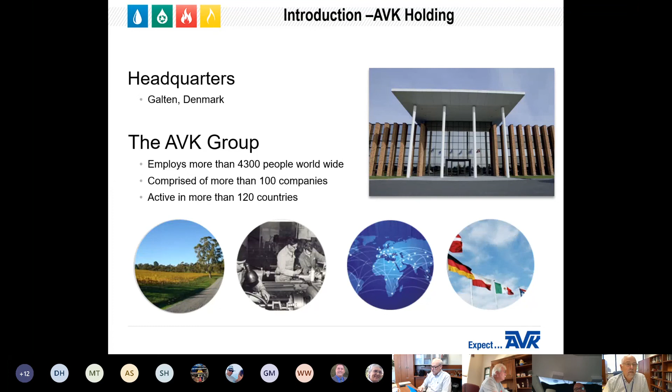American AVK was originally established in the San Francisco Bay Area in 1985. In early 1990, we moved to Fresno, California. In 2007, we built our new 180,000 square foot manufacturing facility on 25 acres of land located in Minden, Nevada. Minden's about 40 miles south of Reno near Lake Tahoe.

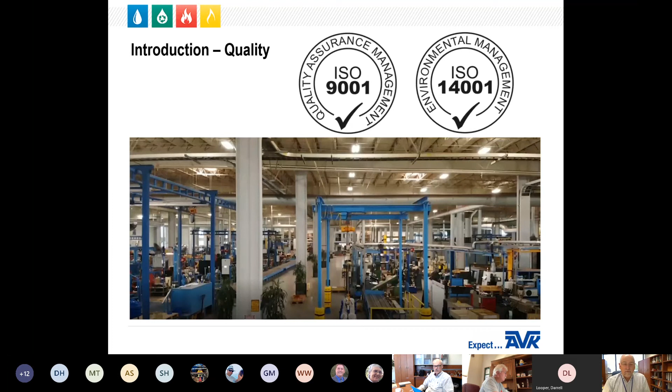American AVK Company is certified to the ISO 9001 Quality Management Standard and also to the ISO 14001 Environmental Management Standard. The ISO 9001 standard ensures that we follow a continuous improvement process to provide a high level of quality from the moment we take your order all the way until our products are installed and fully operational. The ISO 14001 standard ensures that we follow an environmental management system to help our company minimize how our operations might negatively affect our environment. Our employee safety program is also included into the ISO 14001 system.

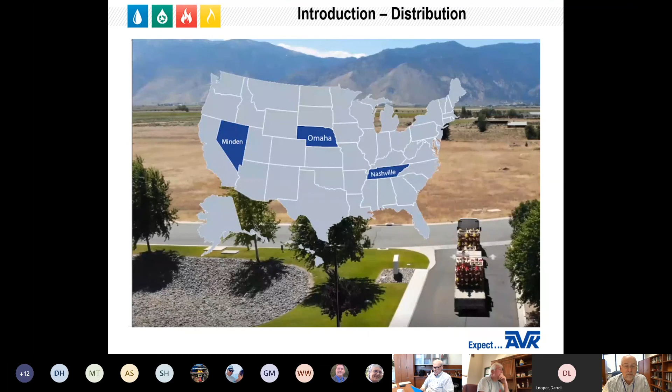Besides our factory in Minden, Nevada, AVK has distribution centers located in Omaha, Nebraska, and also in Nashville, Tennessee. This allows delivery of in-stock products to anywhere in the United States within 24 to 48 hours. Currently, we average about a 6-day delivery time for those items that are not in stock and must be manufactured to your specifications.

So now we're going to go into an overview of the features, advantages, and benefits of the Series 27 dry barrel fire hydrant.

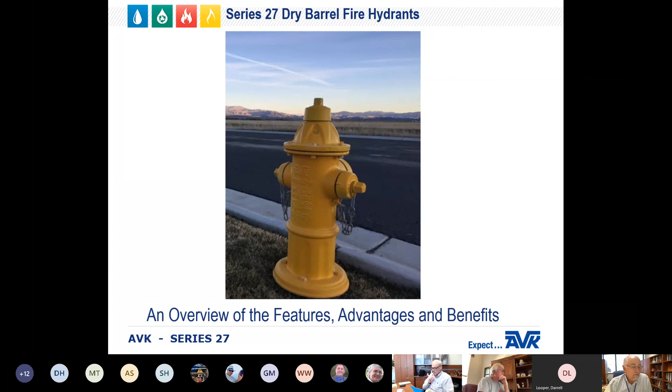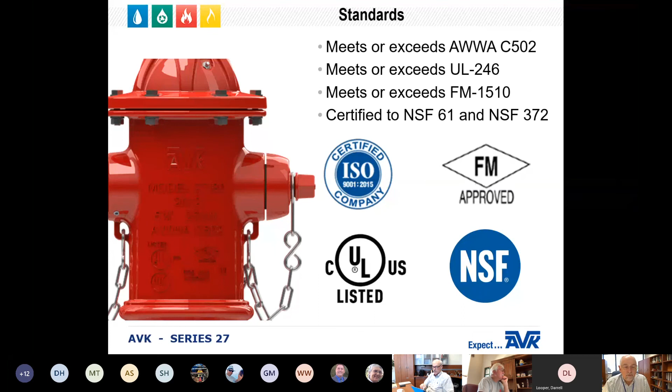The AVK fire hydrants are fully compliant with the requirements of the AWWA C502 standard for dry barrel fire hydrants. Our hydrants are listed by Underwriters Laboratories and approved by Factory Mutual. All AVK fire hydrants are certified to the NSF 61 standard for health effects and also to the NSF 372 standard for low lead requirements. AVK fire hydrants exceed industry standards in regards to flow characteristics and durability, so you can be assured that product quality and safety are our main concerns throughout the design and manufacturing process.

The two Series 27 hydrants shown side by side have one pumper outlet and two hose outlets. The nostalgic style is the red hydrant on the left, and the modern style is the yellow hydrant on the right. Keep in mind that all of the lower barrel, inlet base, and internal parts for the Series 2700 and the 2780 are interchangeable between the two styles. The choice between the nostalgic and the modern style hydrant is cosmetic. In other words, it depends on which hydrant you want to have displayed in front of your home or business.

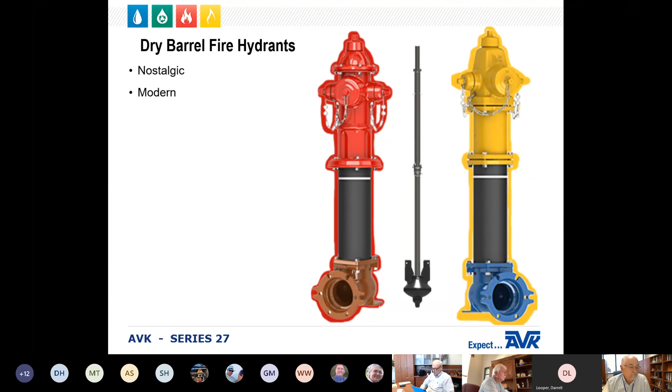Each hydrant is rated for a 250 PSI working pressure. Each hydrant is shell tested to 500 PSI and seat tested at twice the rated working pressure as required by the AWWA C502 standard. In addition, we have completed proof of design testing that includes a shell test at 1,000 PSI, traffic impact testing, and flow testing.

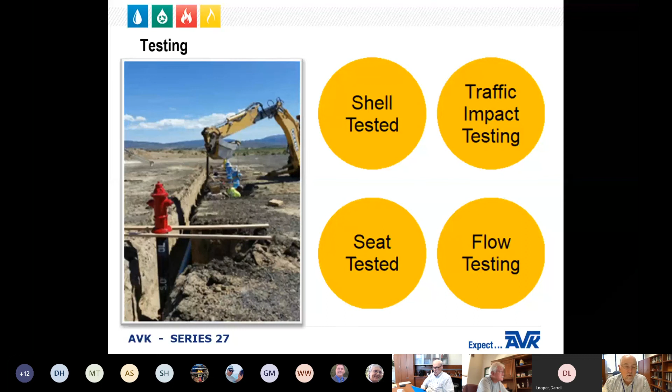In the photo here, you can see the AVK hydrant test site that's under construction at the Minden, Nevada airport for a traffic break flange performance test we did for Houston, Texas.

The internal and external coatings of the nozzle section and inlet base is a fusion bonded epoxy that provides excellent corrosion protection. The epoxy coating also provides a smooth lining on the interior surfaces for lower head loss and better water flow. The internal and external powder coating complies with AWWA C550 standard, written for interior coatings of valves and hydrants. The epoxy coating also meets the requirements of the NSF 61 and NSF 372 standards.

The external coating above ground has an additional polyurethane wet paint layer to provide the correct finish color shade required by the customer and to provide additional corrosion protection.

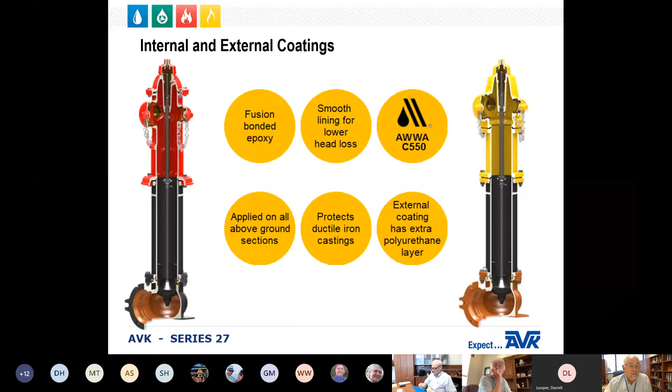The weather shield is a hat-shaped component that sits on top of the operating nut of the hydrant. As you might expect, the weather shield protects the operating mechanism from the elements like harsh sunlight, rain, or snow. It also protects the bronze operating nut from damage from non-standard wrenches.

So if someone tries to operate the hydrant with a pipe wrench, it might damage the ductile iron weather shield, but it won't damage the bronze operating nut. In the unlikely event that the iron weather shield is damaged, it's easier and less expensive to replace the iron weather shield compared to the bronze operating nut underneath.

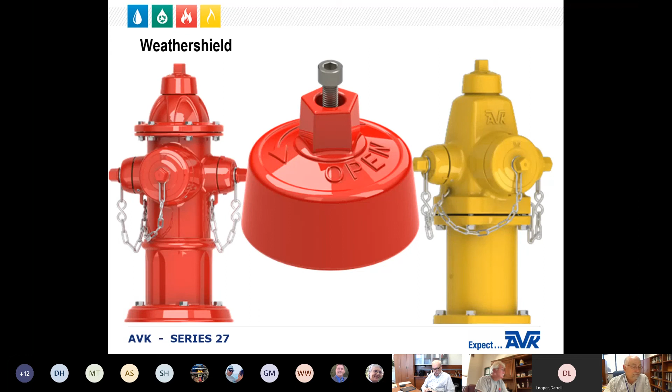The operating nuts on AVK weather shield and nozzle caps can be supplied in a variety of shapes and sizes to meet the needs of local specifications. We supply a wide variety of square, pentagon, or triangular shaped operating nuts.

In areas that require protection from tampering, we can also supply one of two different locking mechanisms, either a locking weather shield or a stainless steel high top thrust collar that surrounds the operating nut. The thrust collar requires a socket type wrench to operate the hydrant. It does not allow a typical hydrant wrench to engage the operating nut.

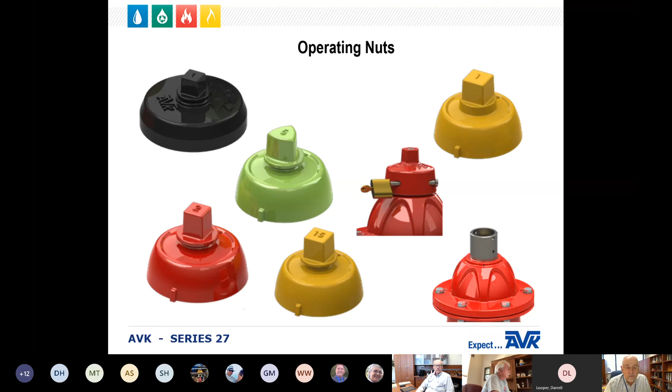These devices may be installed by the AVK factory when your new hydrant is being built, or they can be installed in the field by the end user.

Each hydrant is given a unique serial number that is printed on the paper base tag located on the bottom of the inlet base, and engraved on the top of the operating nut. Older hydrants will have the serial number engraved on one of the side faces of the pentagon, but because this was an as-cast surface, the serial number was sometimes hard to read, so it was moved to the smooth machined surface on top of the nut some years ago.

The unique serial number enables us to determine the date the hydrant was built, who built each hydrant subsection, how the hydrant was configured from the factory, materials used for each component, the pressure test results, and how and to whom it was shipped. In other words, the serial number gives us full traceability to allow better customer service.

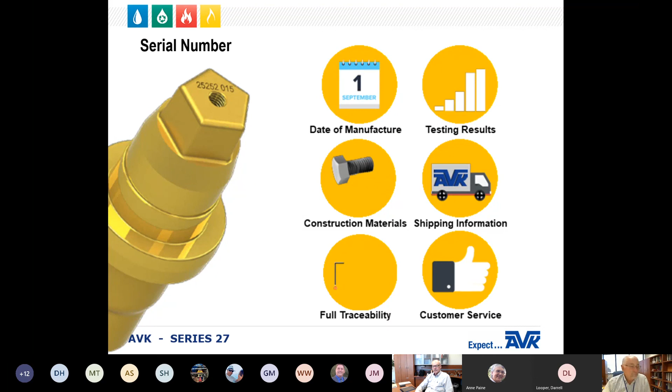The thrust nut and operating nut are cast bronze. The same thrust nut is used no matter if the hydrant is open left or open right. The thrust nut is equipped with internal and external O-rings to prevent water or debris from entering the lubrication chamber.

The operating nut is specifically machined for open left or open right hydrants and is hollow from top to bottom to allow easier installation of the lubricant. The hole through the operating nut allows air to vent out while the lubricant is being added into the lube chamber. The operating nut is self-lubricating, as oil or grease will flow up the stem rod threads.

There is a hole drilled into the side of the operating nut to allow air to enter or escape the internal volume changes due to the opening or closing cycle of the hydrant. The operating nut is provided with an upper stainless steel roller bearing to make the hydrant easier to open under high static water pressures. We have also included a lower polyamide anti-friction washer to ease operation during the closing cycle.

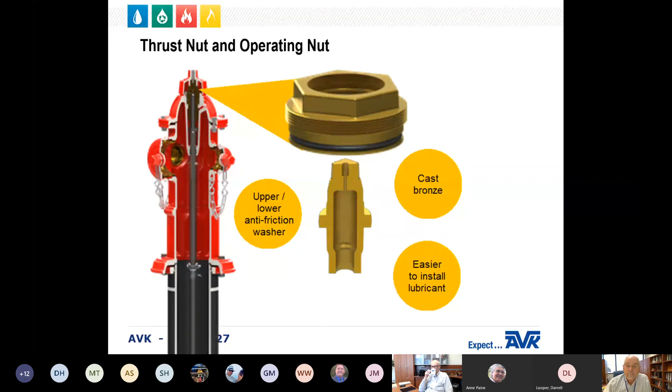The thrust nut is secured in place by a stainless steel lock plate and screw. The corrosion-resistant plate makes it easy to adjust the tension of the thrust nut against the bearings by offering 12 different locking positions on the thrust nut.

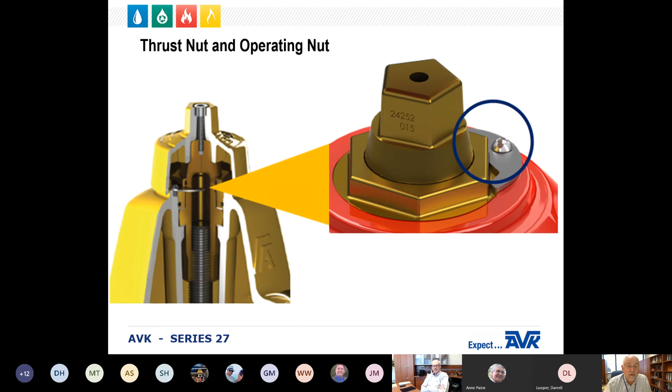AVK fire hydrants are equipped with an external lubrication fitting, making it easier to lubricate the hydrant during regular scheduled maintenance. No major disassembly is required. The fitting is a standard grease zerk for grease-filled hydrants or a brass plug for oil-filled hydrants.

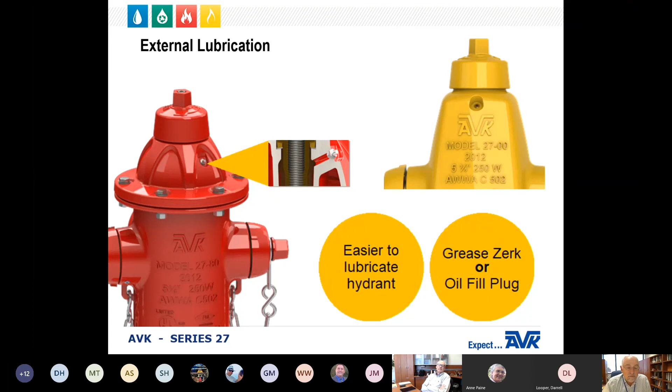The lubrication fitting is always located at the back of the fire hydrant for safety. That way, the person servicing the hydrant can stand on the sidewalk to service the hydrant and not stand in the street where they're more exposed to passing traffic.

The lubrication chamber, which contains the oil or grease required to lubricate the operating mechanism, is sealed by two O-rings in the bottom of the chamber for redundancy. The two O-rings that are mounted on the thrust nut seal the chamber at the top to prevent moisture from getting inside.

You always want to use a food-grade lubricant that will survive the temperature range expected for the climate where the hydrant is installed. Temperatures in northern Canada can fall well below -40 degrees and can exceed 120 degrees in Arizona, so a lubricant with a wide temperature range is absolutely required.

Also, you want to make sure you do not use a lubricant that contains an acetate or silicone. If water somehow does get into the lube chamber and mixes with the lubricant, it can mix with the acetate and form acetic acid, which is very corrosive to iron and mild steel. However, acetic acid is not corrosive to stainless steel.

If you accidentally drip or wipe any silicone-based lubricant on the exterior of the hydrant, you will never be able to have paint stick to that spot again, no matter how hard you clean it. So just make sure no acetate and no silicone in your lubricants.

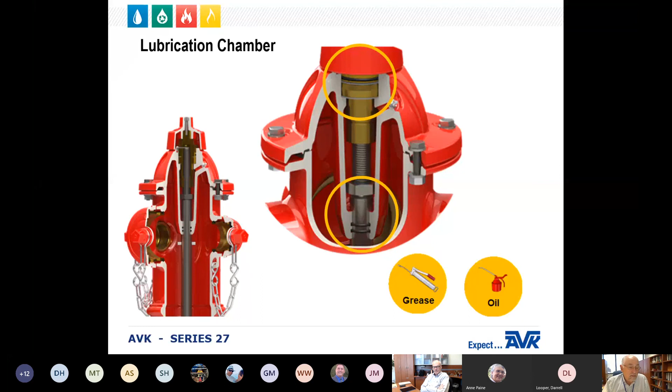The travel stop nut is used to limit the vertical travel of the stem rod to prevent internal hydrant damage in case the hydrant is over-torqued at the end of the opening cycle. The travel stop nut confines the vertical opening load within the lubrication chamber so that the main valve and stem are not damaged by an over-torque event.

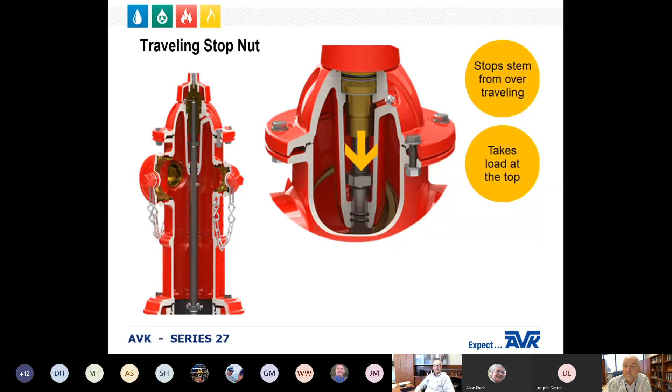All AVK upper stems are made of 304 grade stainless steel as standard. The upper stem rods made of the 316 stainless steel alloy are available as an option. AVK has chosen to provide stainless steel operating stems to reduce the potential for corrosion in the area around the lower end of the lubrication chamber.

The stainless steel upper stems also allow AVK to eliminate the copper or brass sleeve that traditional mild steel upper stems must have to provide a non-corrosive surface for sealing the O-rings at the bottom of the lube chamber.

We found that under certain conditions, water could creep underneath the old style thin brass sleeve and freeze. The expanding of the freezing water would split and crack the thin brass sleeve, allowing water to enter the lube chamber and destroy the lubricant within. We all know that when the lubricant is destroyed, the hydrants become very difficult or even impossible to operate.

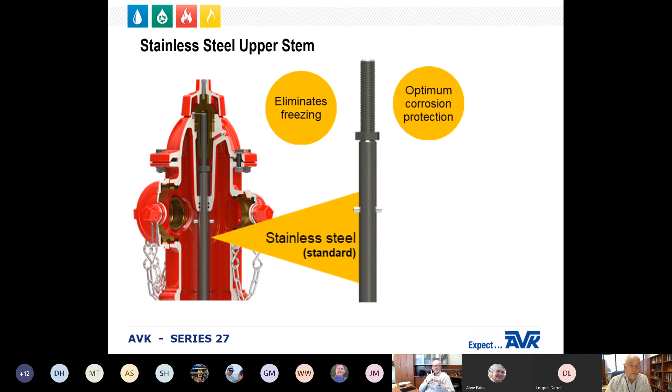There's a stainless steel pin located on the upper stem rod that is used to engage the AVK supplied T-wrench. The pin and the T-wrench enable easy removal of the main valve assembly from the hydrant.

No matter what the bury, the pin is always in the same place for easy access. AVK only requires our factory supplied T-wrench to remove the main valves for any bury depth hydrant. The T-wrench is also used to remove the hexagon stop nut from inside the bonnet lube chamber.

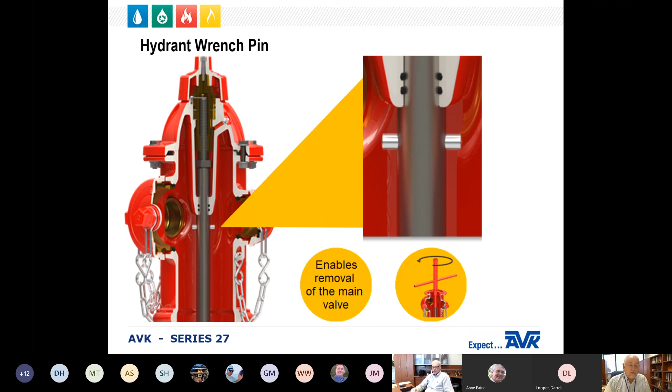AVK uses bayonet style retaining lugs on our outlet nozzles. The nozzle design is easily installed by pushing the outlet nozzle into the hydrant body, then rotating the nozzle about 40 degrees counterclockwise so it's in the locking position.

There are two locking set screws to prevent the nozzle from rotating and also to help prevent excessive nozzle movement. This feature makes the nozzle much easier to replace in the field. However, it should be noted that the O-rings can be difficult to compress, so you may need a rubber mallet to tap the nozzle into place when you're installing it. And by the way, the nozzle cap retaining chains are a no-cost option.

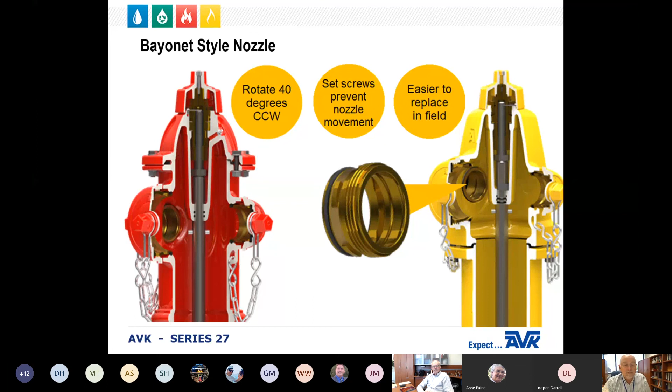All AVK Series 27 fire hydrants come equipped with a traffic break flange as standard equipment. The breakable traffic flange has 4 bolt holes so it can easily be attached to the 4-bolt lower flange of the hydrant nozzle section. There is a shallow groove machined around the top of the lower barrel or around the top of the extension barrel into which a stainless steel snap ring is mounted.

There's a thin machined lip on the inside of the breakable flange that grips the stainless steel snap ring mounted on the lower barrel. When hit by a car, the thin machined lip on the breakable flange will tear away, allowing the hydrant body to separate from the lower barrel.

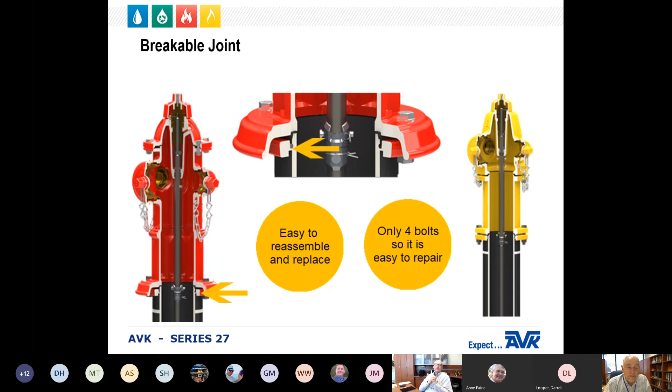There are also small cast-in grooves near each of the 4 bolt holes of the breakable flange that may also fracture depending upon the angle of the car impact.

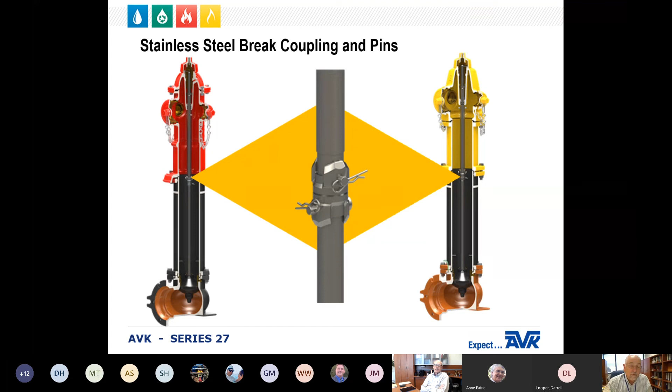To further resist corrosion, AVK uses stainless steel break couplings, extension couplings, and coupling pins on all our dry barrel hydrant models. The use of stainless steel assures longer lifespan for the hydrant components, especially because the interior of these hydrants remains moist all through its life. The low profile design of the stem coupler also helps improve water flow inside the hydrant, resulting in lower head losses.

AVK hydrants include bury depth tags on top of the lower flange of the nozzle section, which makes it easy to determine the bury depth of the hydrant after it's been installed. The tag displayed on this hydrant shows a bury depth of 5 feet 0 inches. The smaller extension tag that comes with all extension kits indicates that this hydrant has been equipped with a 0-foot 6-inch extension. Therefore, a hydrant with both of these tags mounted on the nozzle flange section has a total bury depth of 5 foot 6 inches.

Something to keep in mind is that all extension kits come with 2 non-breakable standpipe flanges, which are used to attach the lower end of the extension barrel to the upper end of the lower barrel. Both of these standpipe flanges have 5 bolt holes, so they cannot be confused with the 4-bolt breakable traffic flange.

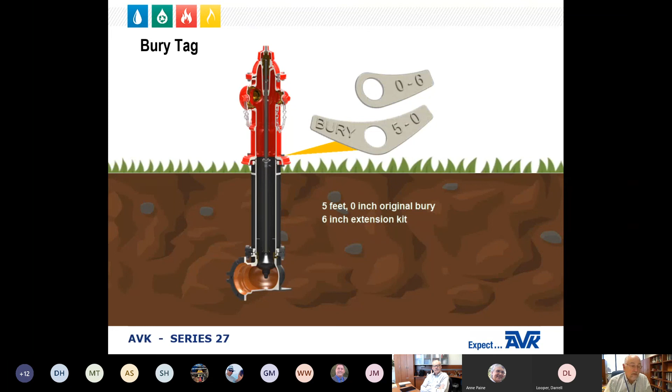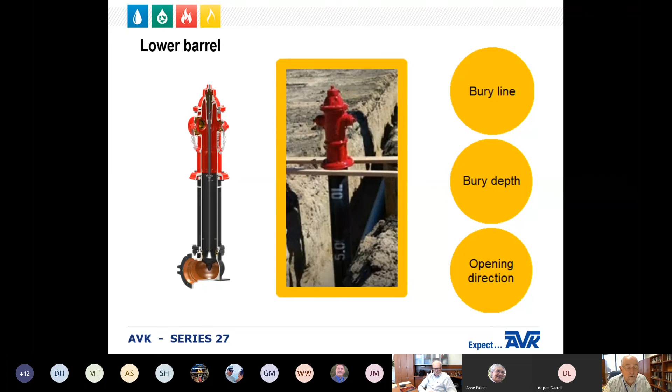The standard material for the lower stem rod is steel. However, as an option, AVK also offers 304 or 316 stainless steel lower stem rods for customers who suffer from very aggressive waters in their fire protection systems.

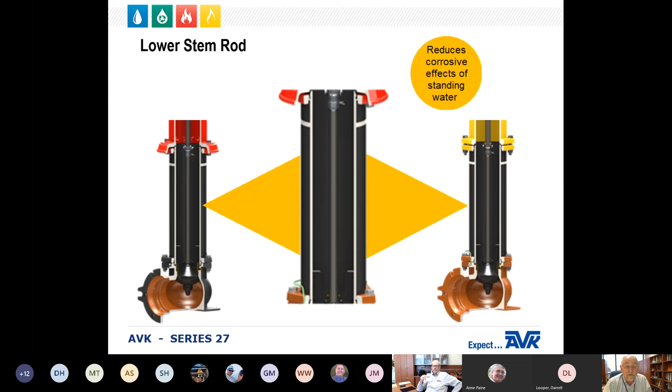The seat and drain rings are all bronze. The seat ring can be easily plugged to prevent draining if required. Drain ports are always located to the sides of the inlet base, directly under the hose nozzles, when the hydrant is shipped from the factory. Drain ports can be plugged internally on the seat ring or externally on the inlet shoe. If your hydrant must be plugged, we recommend plugging internally on the seat ring so that you have the option to unplug the hydrant in the future by removing the main valve to remove the screwed-in plugs.

As mentioned previously, all bolting below ground is 304 stainless steel for corrosion resistance and long life. 316 bolting below ground is optional for those areas that have highly active corrosive soils.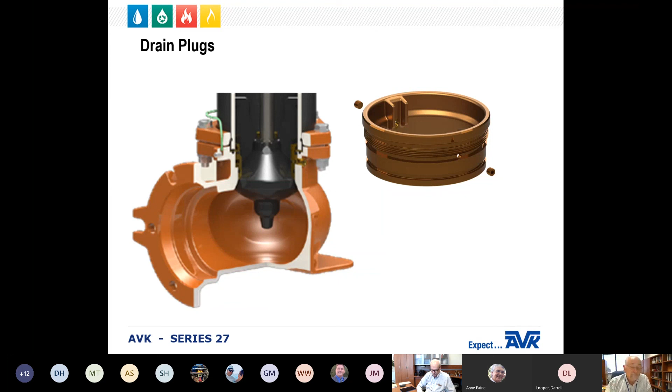Located at the bottom of the hydrant is one of the most important features: the one-piece main valve patented by AVK. The main valve has a ductile iron core that is encapsulated with EPDM synthetic rubber. EPDM is resistant to chlorine, chloramine, and UV light to provide a long service life. The AVK main valve eliminates the large number of parts used by our competitors, thus reducing your spare parts inventory and making it very easy to replace. The EPDM covering of the main valve is very durable and has an excellent memory, even though the hardness of the rubber is 85 on the Shore A scale.

If a small stone should become embedded in the seating surface of the rubber, all you have to do is open the hydrant and flush the stone out. The memory characteristics of the EPDM rubber will enable the main valve to regain its original shape, making it very durable and long-lasting. We are so confident in the performance of our one-piece main valve that it is covered by a separate 25-year warranty now.

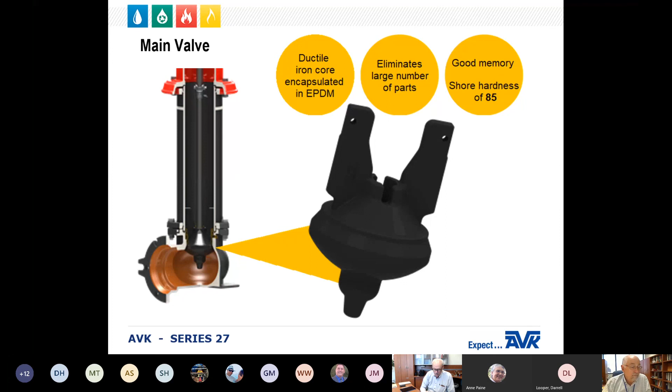The hydrant base has a 5-bolt mounting pattern and uses the same 5-bolt standpipe flange supplied with our barrel extension kits. The 5 mounting bolts for the inlet shoe are 304 stainless steel with Teflon-coated hex nuts as standard equipment. The hex nuts are Teflon coated to prevent galling between the stainless steel bolts and the stainless steel nuts. 316 stainless steel bolting below ground is also available as an option, as I mentioned before.

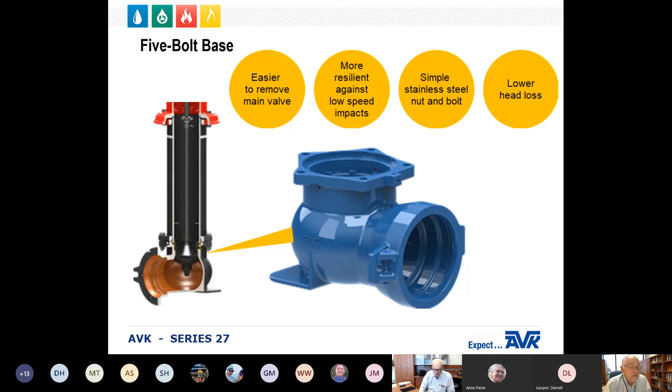Another benefit from the 5-bolt design is that it helps provide a lower head loss, because we are able to install the main valve ears in a particular position in every hydrant that aids in directing the water flow upward when the hydrant is open. Testing has shown that the position of the main valve guide ears in relation to the pipe feeding water to the hydrant will greatly affect the total head loss. So with this design, we can now assemble the hydrants every time to get the lowest possible head loss.

The hydrant inlet shoes are equipped with an anode lug, which allows easy attachment of a wire connected to a sacrificial anode in areas where galvanic corrosion is a problem. With the anode lug, there's no need to weld on thermite blocks, which can damage hydrant coatings and rubber components. The anode lug can also be used as a tracer wire connection.

There's an integral flat plate cast onto the back and bottom of the inlet shoe to steady the hydrant vertically during installation.

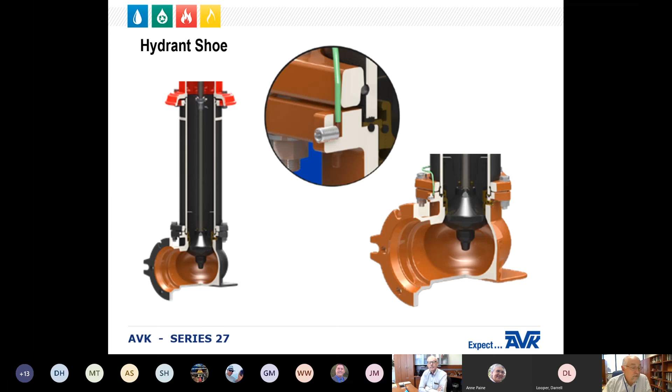AVK provides a wide range of inlet connections to connect the hydrant to the distribution system. For 4-inch pipe connections, we have MJ, flanged, and polyethylene, or what we call HDPE bases. For 6-inch pipe connections, we offer MJ, flanged, push-on, polyethylene, and also a straight inlet connection. We also offer an MJ inlet base for 8-inch connections, and our newest offering is a 6-inch Hymax connection, which is a 1-bolt design. We also provide inlet bases equipped with ISO 1092 standard flanges, specifically for 100 and 150 millimeter metric size pipes typically used in the Caribbean, some regions of Mexico, and other areas outside the USA.

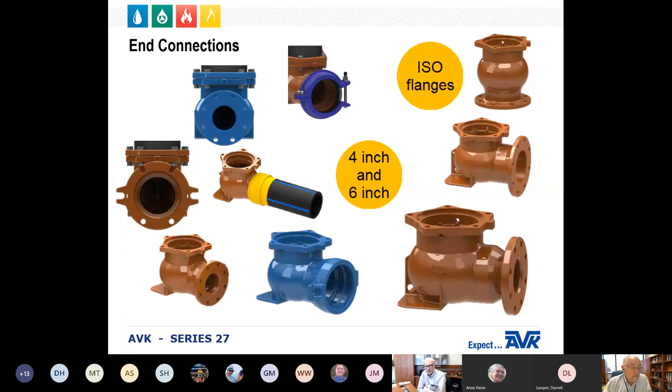There are 3 barrel gaskets used in our 2700 and 2780 hydrants. They are all the same gasket to help reduce your spare parts inventory. The first gasket is located between the bonnet and the nozzle section on the 2780 nostalgic style, or in the 2700 model, between the nozzle section and the upper barrel. The second gasket is located between the nozzle section and the lower barrel, right at the breakable flange. The third gasket is located between the lower barrel and the inlet shoe.

The gasket is made of NBR synthetic rubber to resist organic compounds that may be found in the soil around the hydrant. The gasket also has a stainless steel insert to help retain its round shape. The gasket has a short rubber skirt molded around its outer edge, so when you place it on the sealing surface, that skirt will help keep it in place. This feature also makes it much easier for one person to reassemble the hydrant without worrying about the gaskets moving out of place.

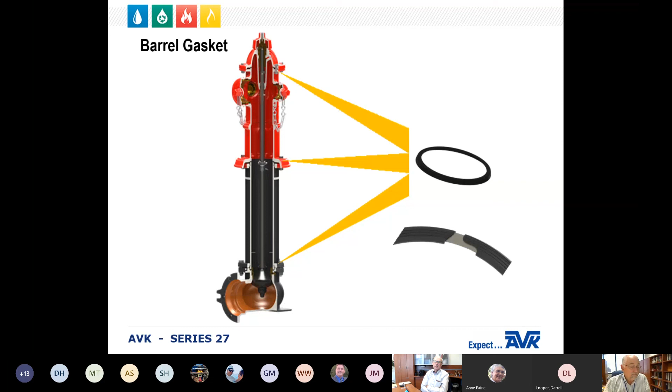A great advantage of AVK fire hydrants is that they have a low parts count. This benefits everyone because they can maintain a smaller parts inventory with less overhead cost. Anytime we modify or update a component of the hydrant design, we try to make it interchangeable with all older Series 27 hydrants. This assures that AVK always has the parts our customers need, which expedites parts delivery, eliminates the customer's need to keep a large inventory, and reduces confusion when parts are ordered.

If a customer orders a standard part by 1:00 p.m. Pacific time, that part will ship the same day. Custom parts such as outlet nozzles that have a special unique thread may take 3 to 6 days before we can ship them.

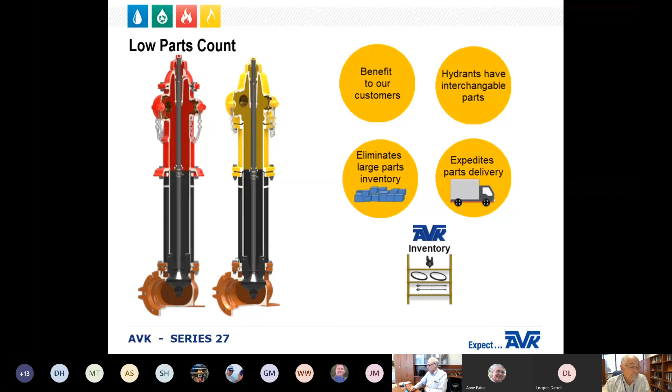AVK also simplifies the inspection, maintenance, and repair of our hydrants by providing a toolkit. The removal of all working components can be easily accomplished from above ground with the use of AVK's lightweight T-wrench and T-wrench centering tool. The toolkit includes our AVK operating wrench, which can be used to remove the operating nut, the thrust nut, or the outlet caps.

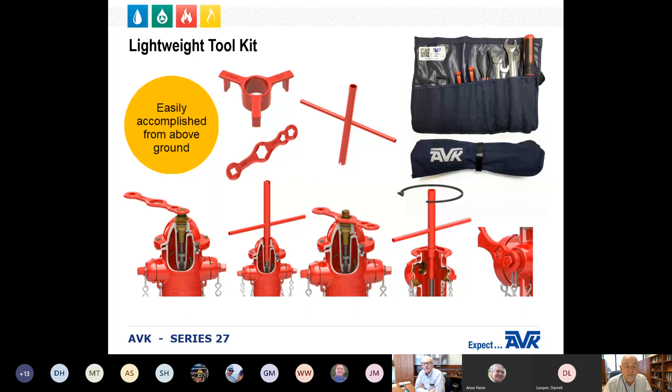Our T-wrench has a hex socket in one end that is used to remove the traveling stop nut. The other end of the T-wrench has a slot to engage the pin installed in the upper stem rod to remove the main valve in the seat ring. The T-wrench can be used with the AVK centering tool to reduce side-to-side movement of stem rods when you have deeper bury hydrants.

The product range for the Series 27 hydrant is quite broad. Keep in mind that not all hydrant configurations are available for both the 2780 and the 2700. It's also important to remember that some nozzle configurations, such as the single pumper configuration, may not be recognized by UL or FM. The AWWA, UL, and FM standards all require a fire hydrant to have at least 2 outlet nozzles to be officially considered a fire protection hydrant.

The 2780, or the nostalgic style hydrant, can be configured with a traditional 3 outlets, which is 1 pumper and 2 hose outlets. It can have 2 hose outlets with no pumper, 2 pumper outlets with no hose outlets, or as just a single pumper outlet.

The 2700, or what we call a modern style hydrant, can be configured with the same traditional 3 outlets of 1 pumper and 2 hose, 2 pumper outlets with no hose outlets, or as a single pumper outlet.

The modern style hydrant can be configured with 5 different above ground heights ranging from our standard 12-inch upper barrel up to our 30-inch alpine upper barrel, specifically intended for deep snow locations.

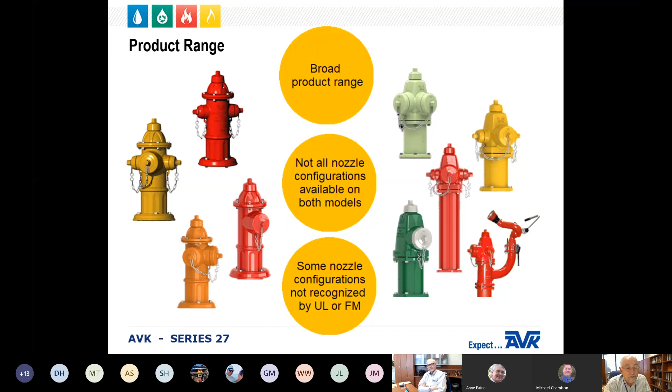The 2700 modern style hydrant may also be configured as a monitor hydrant with either a 3-inch or a 4-inch monitor nozzle mounting flange.

We also offer a wide range of accessories. The lower barrel extension kits range from 6 inches to 60 inches, but on special requests, we can also manufacture custom length barrel extensions. Traffic repair kits are provided in case the hydrant is knocked over by a car.

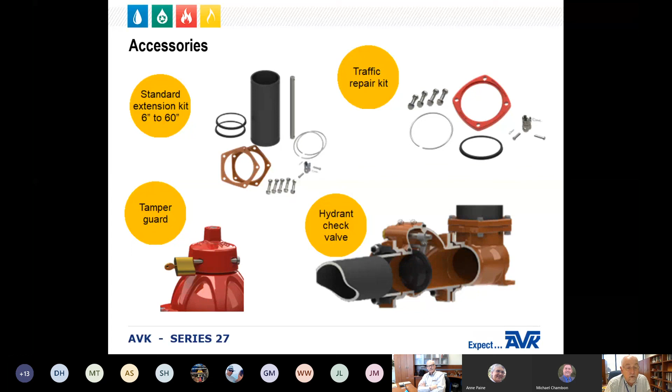The tamper guard weather shield device is designed to lock the hydrant and prevent unauthorized operation. And we offer a flapper type hydrant check valve that is intended to prevent unauthorized contamination of the water system or to prevent cross connection of the distribution system.

The options for an AVK fire hydrant are almost limitless, with all of the different choices of color, bury depth, opening direction, nozzle threads, operating nuts. AVK can manufacture over 610 trillion fire hydrants, no two alike.

We can make the body, bonnet, and caps any color or combination of colors per the custom requirements of the water utility. We supply hundreds of different outlet nozzles and nozzle threads, as well as storz hose connections. We offer 3.5 inch, 4 inch, 4.5 inch, and 5 inch threaded pumper nozzles, as well as 4 inch and 5 inch storz pumper connections.

Operating nuts come in 27 various sizes of squares, triangles, and pentagons. Lower stems can be steel or stainless steel. As standard, we provide 304 stainless steel bolting below ground with zinc plated bolting above ground, but as an option, we also offer 304 or 316 stainless steel bolting above ground and 316 bolting below ground.

Drains can be unplugged or internally or externally plugged. Hydrants can be open left or open right, and bury depths can range from 12 inches down to more than 18 feet.

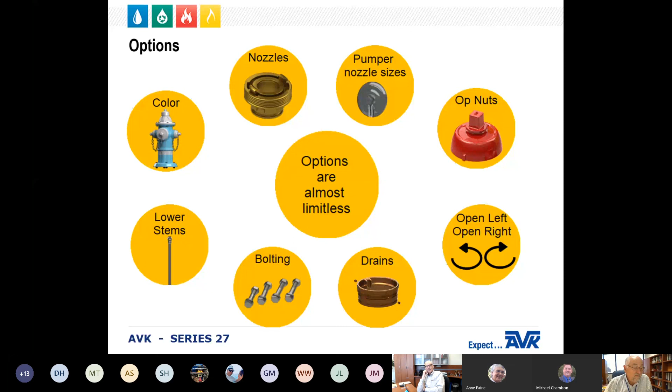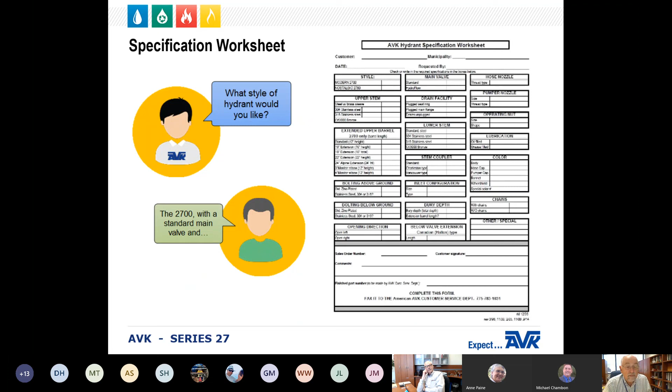There are so many different options that we like to use the AVK Hydrant Specification Worksheet. It's kind of a checklist for the distributor and the end user to help ensure that the customer receives exactly the hydrant that they need.

So, as a quick overview and review, AVK fire hydrants are fully compliant with the requirements of AWWA C502 standard for dry barrel fire hydrants. Our hydrants are also listed by Underwriters Labs and approved by Factory Mutual.

All AVK fire hydrants are certified to the NSF 61 standard for health effects and to the NSF 372 standard for low lead exposure. AVK has successfully completed seat testing, proof of design testing, shell testing, traffic impact testing, and flow testing as required by the various agencies that have standards for fire hydrants.

There are many important fire hydrant construction features, everything from the weather shield to the stainless steel upper stem to the breakable traffic joint, all designed to make AVK hydrants more corrosion resistant, long lasting, easier to maintain, install, and repair. The unique serial number on the hydrant operating nut allows AVK to track the history of the hydrant.

AVK fire hydrants have a low parts count, which means our customers can maintain smaller parts inventory. The product range of the Series 27 hydrant is quite wide. We offer extension kits from 6 to 60 inches, and we can also provide custom lengths on special order. We offer traffic repair kits, lockable tamper guards, and hydrant check valves.

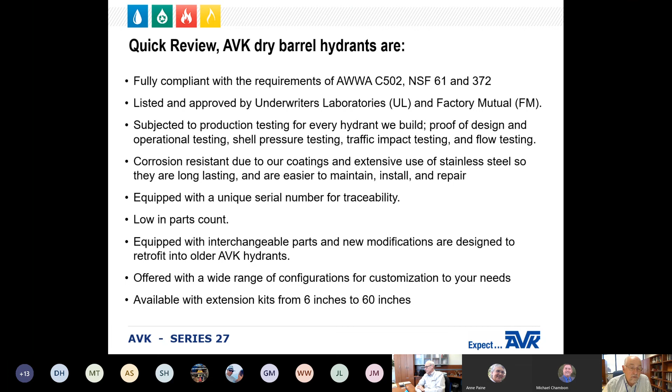Brings us to the end of the presentation on the Series 27 dry barrel fire hydrants.